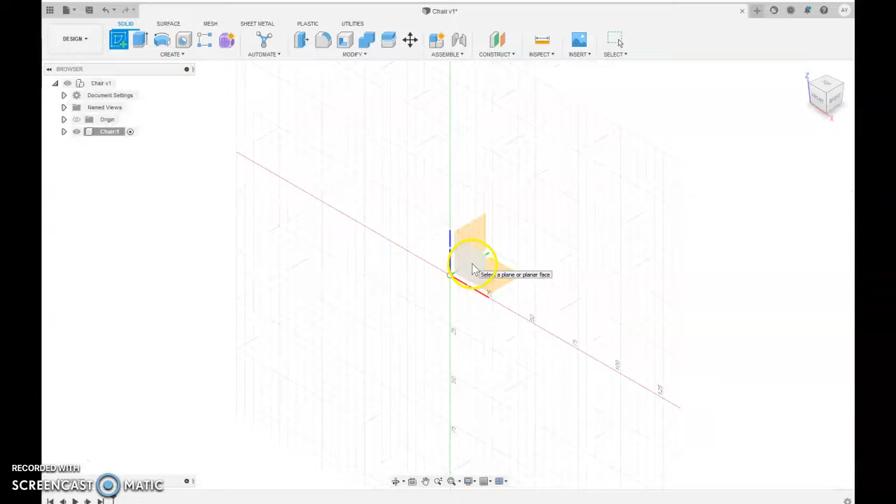I start with a sketch and I'm going to select the face and draw it there. And now I've gone into 2D mode, a 2D sketch mode. I'm basically going to draw here on this sketch - it's like a sheet of paper, really.

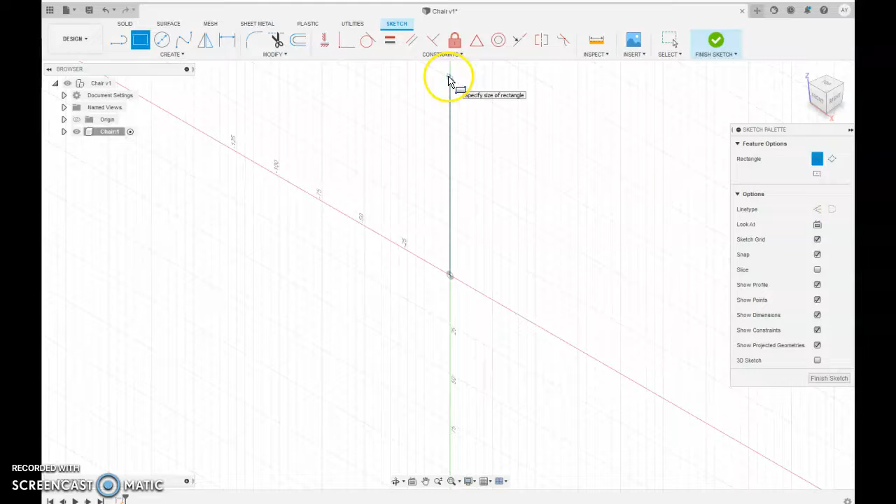If I go into this view, you can see there that this is like a sheet of paper. So I'm going to start to draw a chair shape. I'm going to do a very simple chair shape.

You see that's a rectangle there. I'll go back into a front view now so you can see that that's just like drawing on a piece of paper. Here's another useful tip.

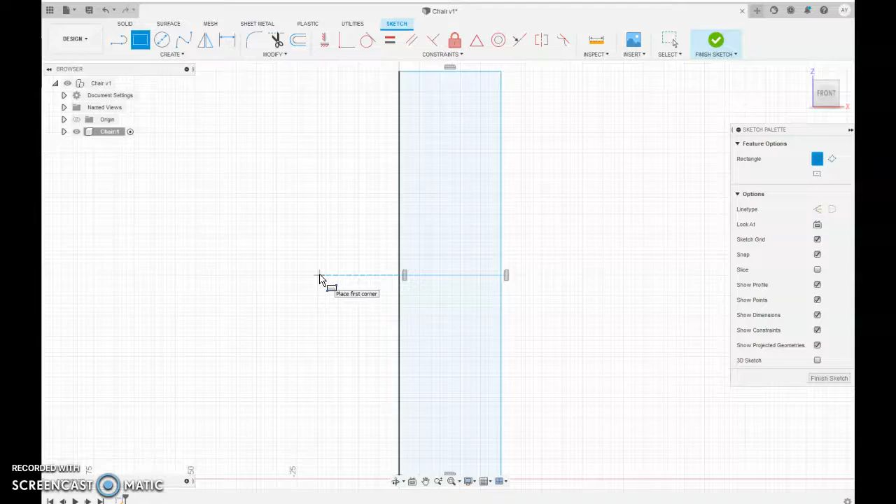So we click on here and we zoom fit, and that will move what you've drawn into the picture. Really good to have a scroll wheel mouse, because by using the scroll wheel in the middle, I'm zooming out. So I would highly recommend that you get yourself a scroll wheel mouse.

I'm going to draw - you can see that's still highlighted, so I can draw another box or rectangle. You see how it snaps to that point there. I'm going to construct a really simple chair out of some rectangles.

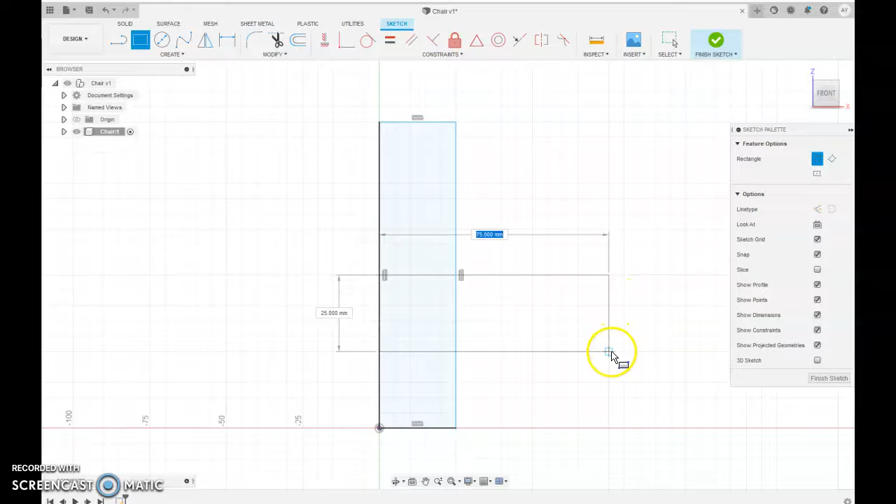And what we can do then, you see we've got to modify. If it goes purple, it's going to disappear. So I'm trimming off the bits I don't need.

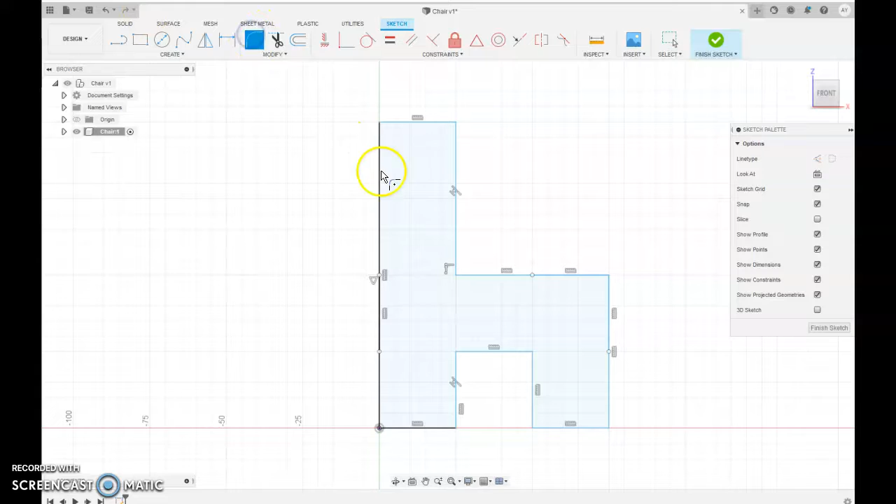And then I've also got this nice little fillet, and it will let me choose - 5mm is nice. So, and then we can press enter, and we can do the same thing again. Enter.

If we wanted to - whoops, don't forget to go back to your fillet command. Now this time it's chosen a 10 for us. It thinks we might want 10. It kind of predicts, but if I want 15...

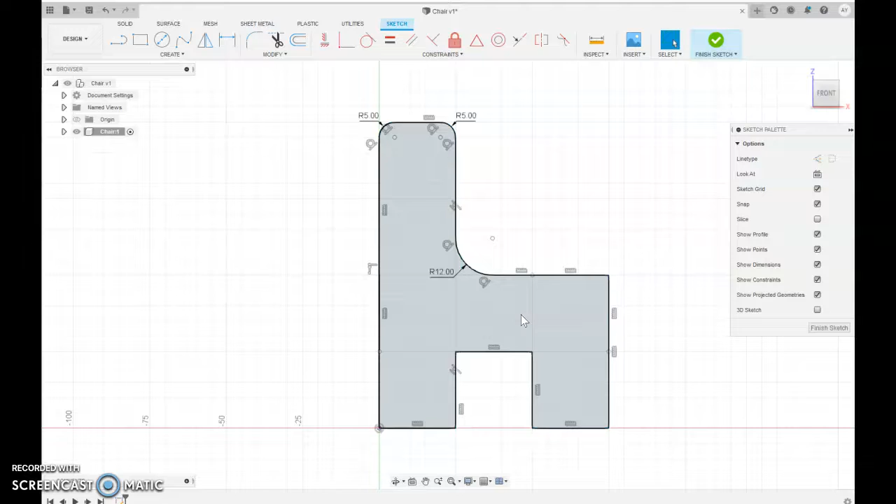And you can see you get a preview. Maybe I'll try 11. You can make up your own mind what you think is suitable. 12, and I can do enter. Now this is light blue, which shows me that it's a closed shape, and that's quite important.

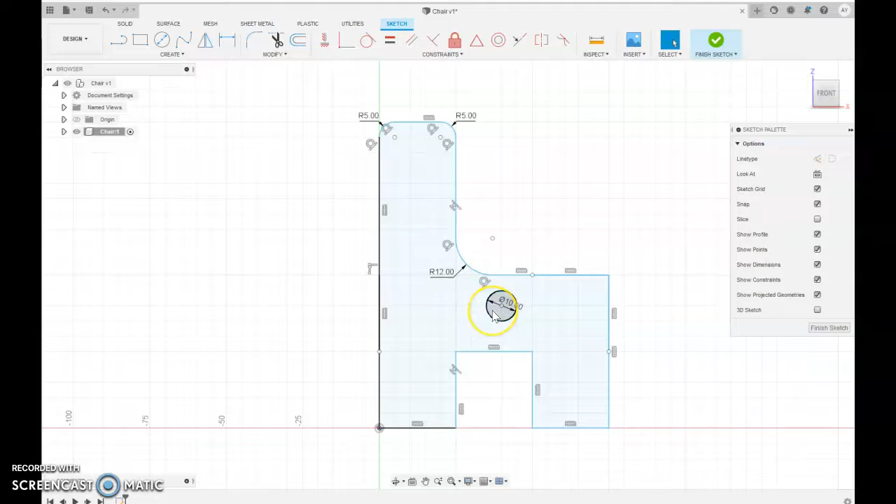You can go around and continue to put fillets on if you want to. I'll just show you one other thing while I'm here. I'm going to put a circle in here. It's snapping to the grid, so I'll just put a circle in here, and I can change that to say 10, and then press enter. Now you'll notice that it goes dark grey, or if I'm in the box here, this goes dark grey. So we'll finish the sketch there.

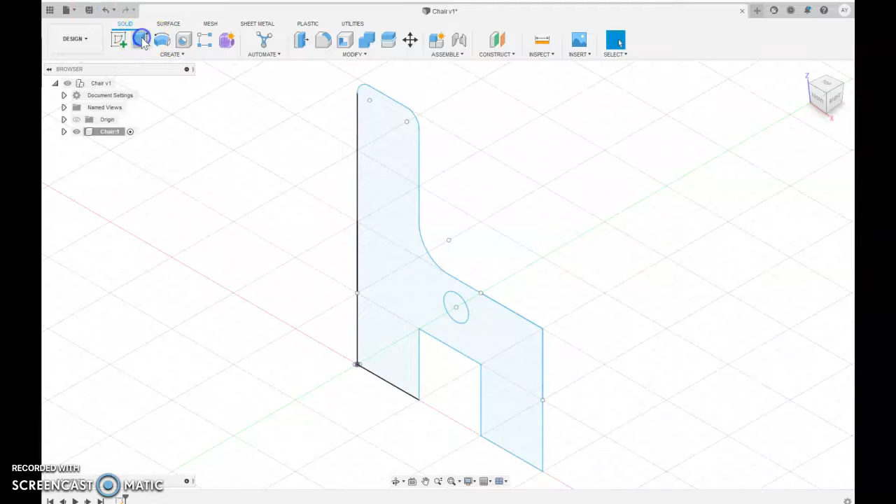Finish sketch. And the next thing we're going to do is we're going to actually extrude that. So I'm going to put it into this home key, puts it into like an isometric view. And I'm going to extrude. And I can look at this now. This is important, I'm choosing.

And you see that I can select. If I click it again, I deselect it because I actually want to leave a hole in there. So, and then how many millimeters do I want to go? Let's say 50. So you can see this would not be a full-size chair. I've drawn it at this size.

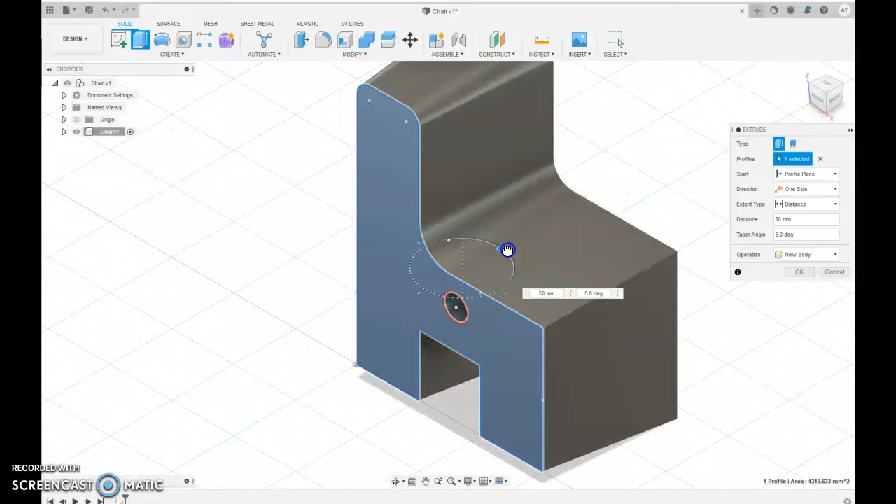You can choose that when you're drawing your rectangles. You can choose the size of them. This is just a quick start to show you how to draw. So if I say 50 millimeters, we can do, I'm happy with that. Now interestingly enough, if I wanted to, you can do some pretty strange things with it there by changing the angle. It's called putting a taper on it, and sometimes, there you go, you can make it so it gets bigger as you get further away, but that's not a useful feature for our chair, so we'll leave that at 0 degrees. Okay, and it's a new body, and so we just click on OK.

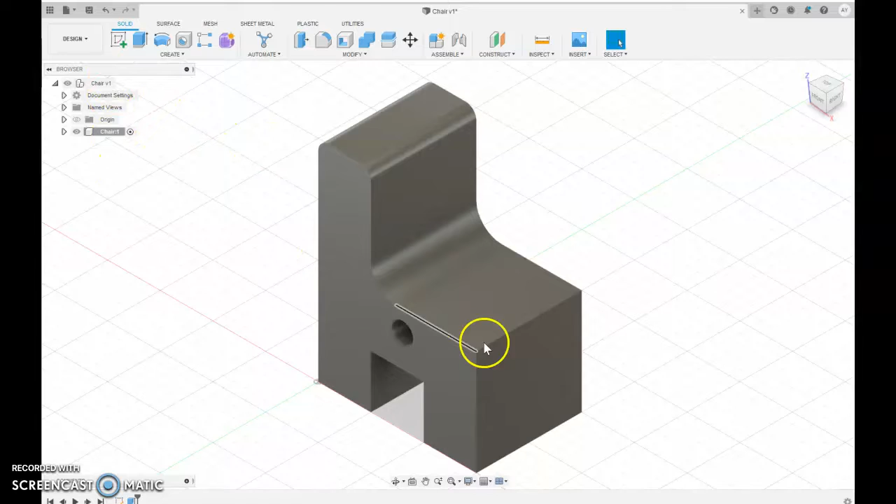And again, we can zoom fit, poof, and there is a very simple chair. If we wanted to now put a hole through the other side, I can do that. This is still all part of the chair. Okay, so I'm now going to create a sketch on this face here.

And I'm going to do a 10 millimeter hole, 10 millimeters, and then press enter. I'm going to finish the sketch. I'm going to extrude again. I'm going to select that. And I can say cut. And there.

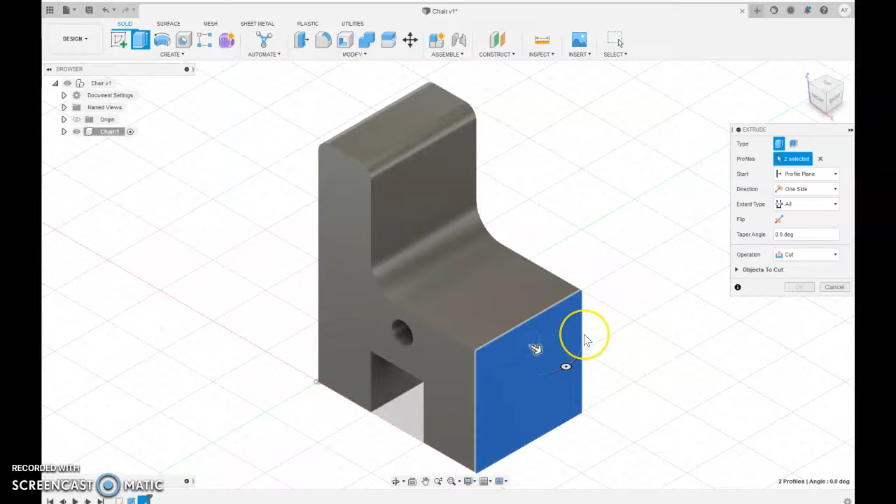Whoops. Select that again. Oops. Right, so if you get to a point where it's kind of going a bit bananas and not doing what you want it to, you can just press cancel. That's all good, and you can start again. So just keep calm and carry on. If that happens, no dramas.

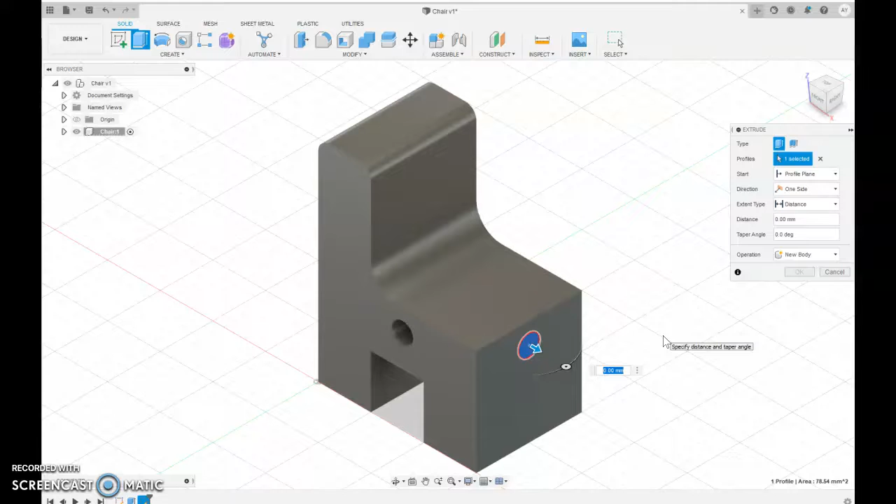You see that's still selected because it's blue. I can check, that's blue. I'm going to extrude again. And actually I needed to then make it go dark blue in the middle. So I clicked on it. This is all good because you can see how, if things don't go as you expect, how to solve the problem. I'm going to want it to go the other way.

So I can just drag, you see how I drag the arrow? I'll want to cut. It remembers I did cut before. And if I go all, that will go all the way through to the other side. I can do okay, and now I've created a hole. I can spin that around and have a look. And you can see, and actually the two holes intersect in the middle, don't they? It's quite cool.

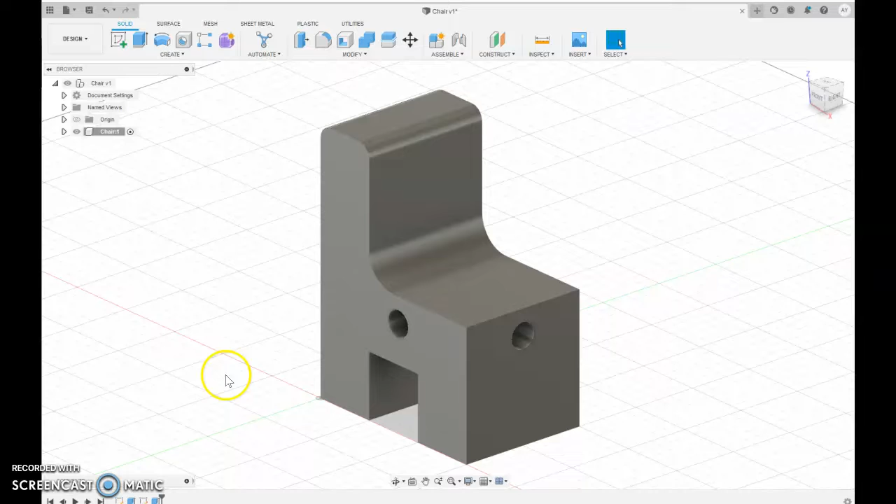So that's basics on how to create a shape, 3D solid model in Fusion 360 using Rule 1, which is really, really important. Thank you.